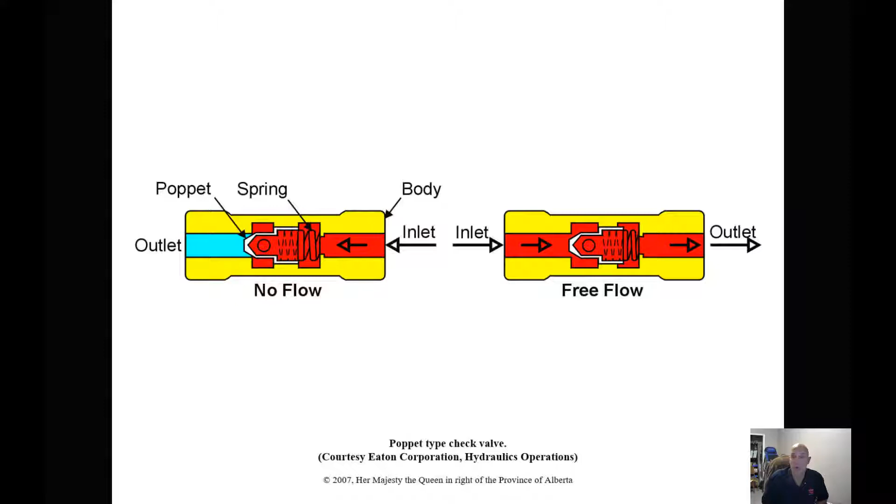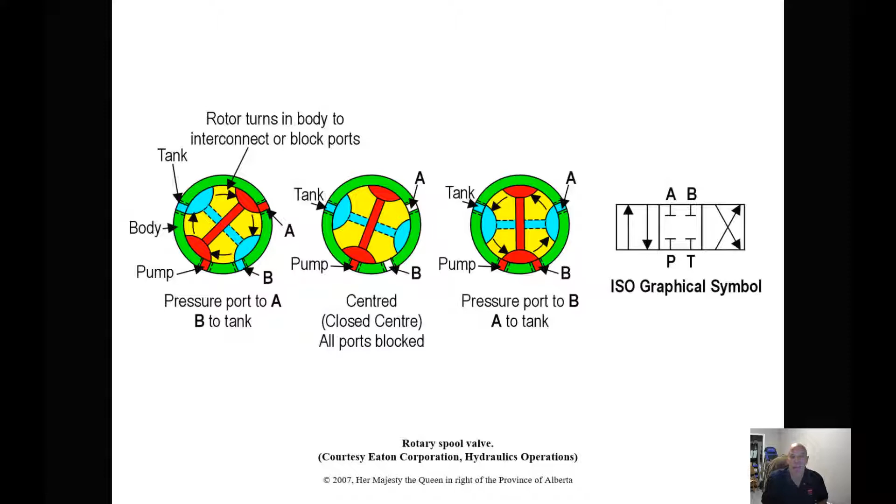A lot of these that we're going to talk about today, we've already looked at. So for instance, a poppet style check valve. Again, it's just a check valve, and it uses a spring to close it so we only get flow in one direction. When we're taking a look at a rotary spool valve, again, when we look at a schematic, it may not tell us, or it's just a closed center system. So we don't know it's a rotary spool valve. We may have to look at the piece of equipment. Doesn't matter whether it's a rotary spool valve or a spool valve. Again, they both have the same schematic and they both do the same thing.

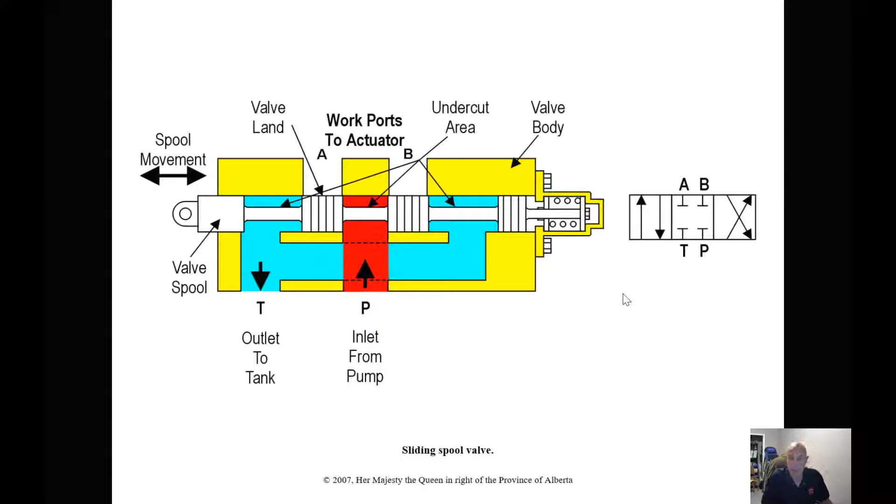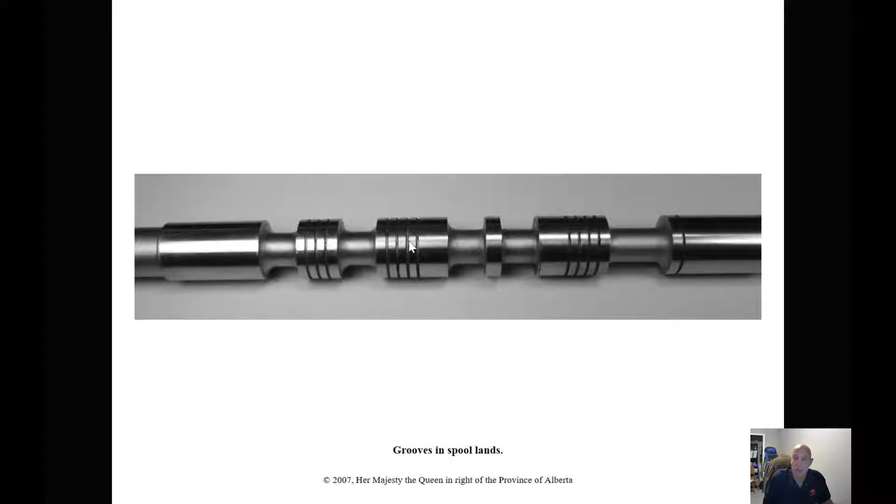So when we take a look again at the spool, the grooves in the spool retain some oil to help seal the spool so we don't get any leakage. We have metering notches on the spool itself so we can feather the control to move the cylinder really slowly. We take a look, we have an accumulator. We know it's a gas charged accumulator. We have a one-way check, positive displacement pump, a relief valve in the system, and a reservoir.

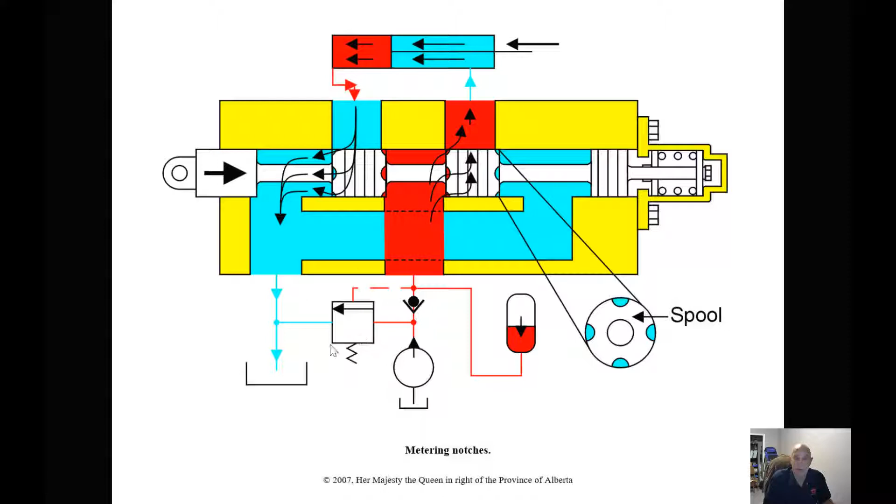Now, one of the things we didn't spend too much time on is that a control valve may have 4 positions. So when we let go of the controls, with the spring, it goes back to a neutral position where the controls aren't moving. So anytime we have any issues, if we let go of all the controls, it should go back to a neutral position. Everything should stop. So if we pull back, we have a raised position. We push forward, we have a lower position. We push all the way forward, and there's usually what's called a detent that will go into what's called a float position. And this allows the oil to travel from one end of the cylinder to the other end of the cylinder, back and forth, without us moving any of the controls. Some operators will use this for backblading.

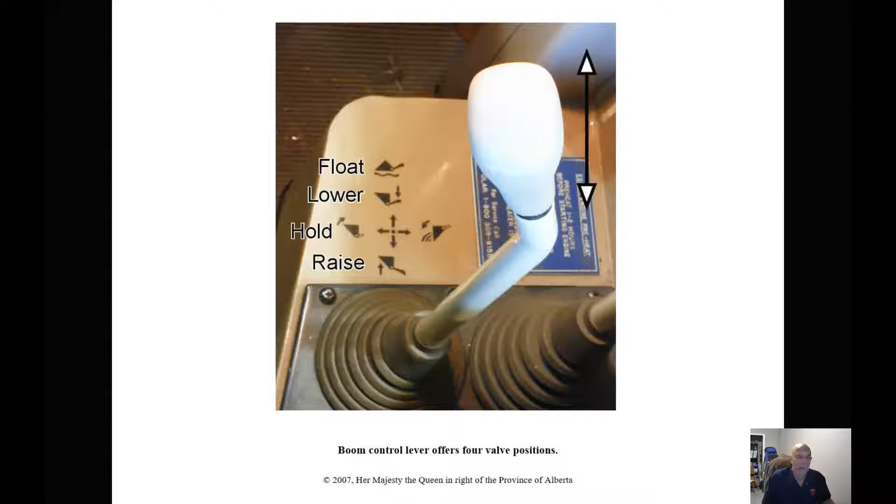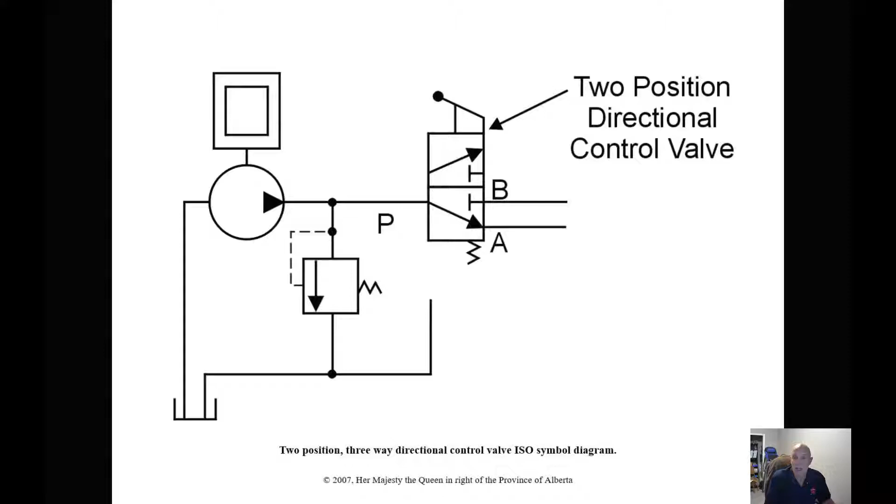So let's take a look at some control valves. So here we have a 2-position 3-way. As we discussed earlier, we have 2 separate blocks, so we know that's a 2-position. 3-way means we have 3 lines coming in and out. So here's 1, here's 2, here's 3. So where would we use something like this? Well, we could use this in a dump box to raise and to lower. Or we could have it go to some component that doesn't return the oil back through the valve. So here, oil can go out to either A or to B.

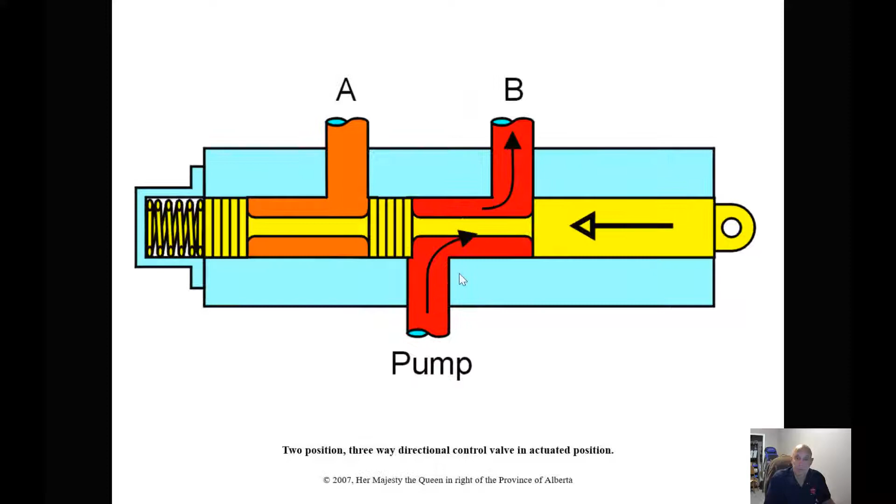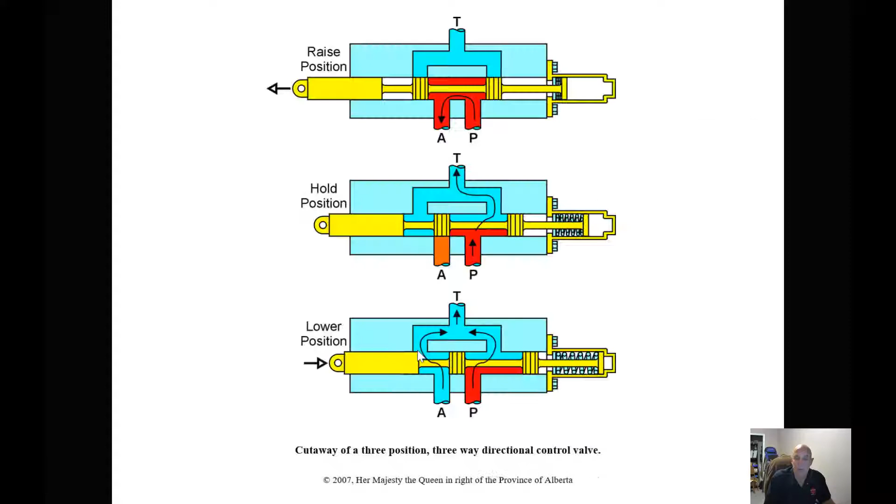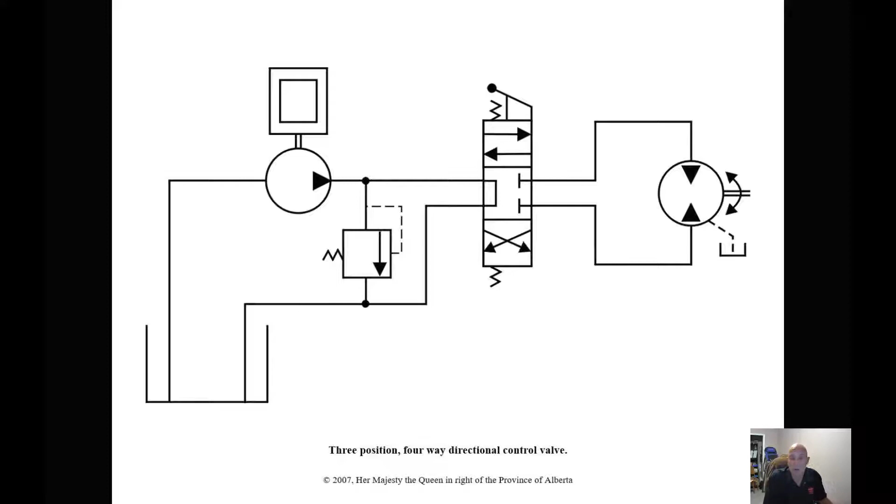And here's a good way to test if, for instance, the motor isn't functioning properly and doesn't have the power we need: we can just pull off the case drain and drain it into a bucket and see how much leakage we're getting past that motor through the case drain. That may be where our issue is. So it's a good, quick, easy way to check. The 3-position 4-way valve is probably one of the most common that we're going to see.

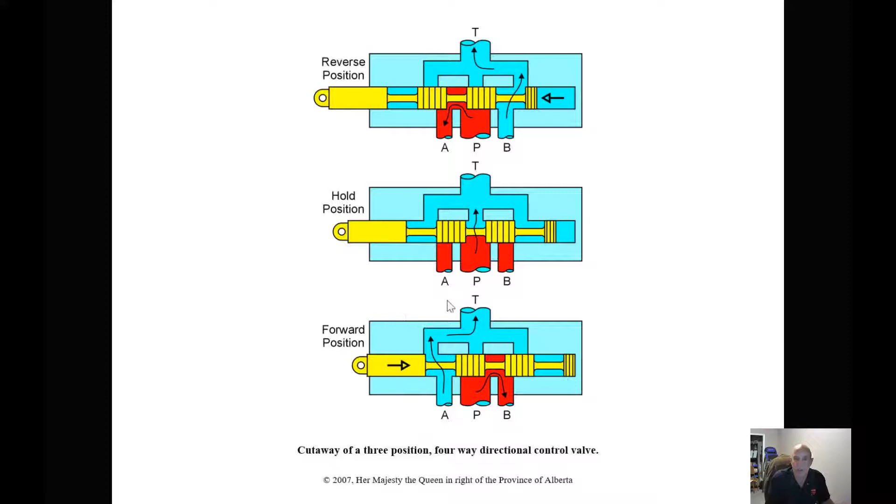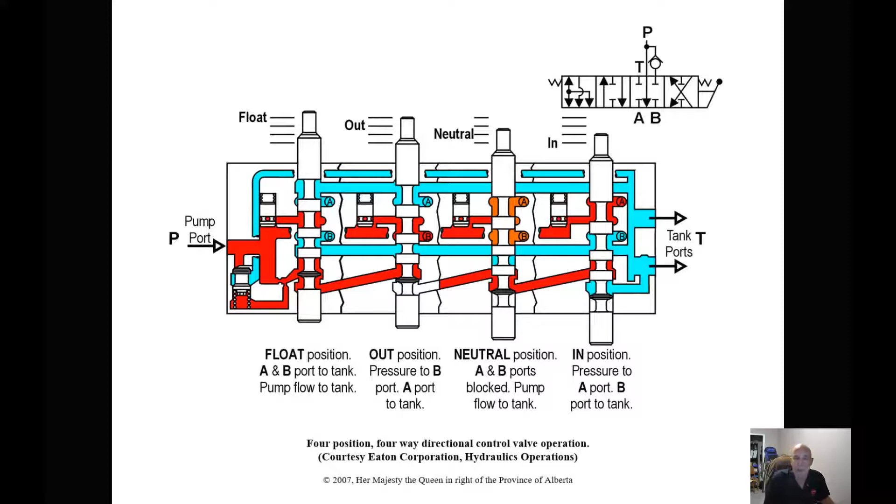Now 4-position, that is the 4th position is the float position. Again, what it does is it just opens everything up and allows oil to flow freely back and forth to any end of the cylinder we want, and it can also return the oil back to pump or back to tank. So we've discussed open center and closed center systems. Again, open center systems return the oil. There's no restriction in the line. The pump runs all the time, displaces the same amount of fluid.

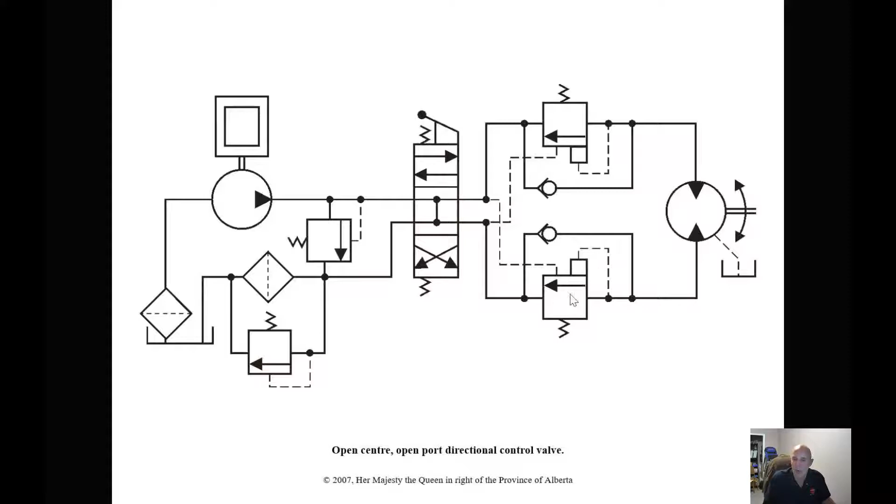So when we supply pressure to one side, it can go through and allow the motor to turn. As the motor turns, it builds pressure in the opposite side, because as fluid's coming in to turn the motor, that other fluid that's in there has to be displaced. It can't go out this check, but it will run this pilot line that will open up this valve and allow that oil to return back to tank. Does the same thing when we go in the opposite direction.

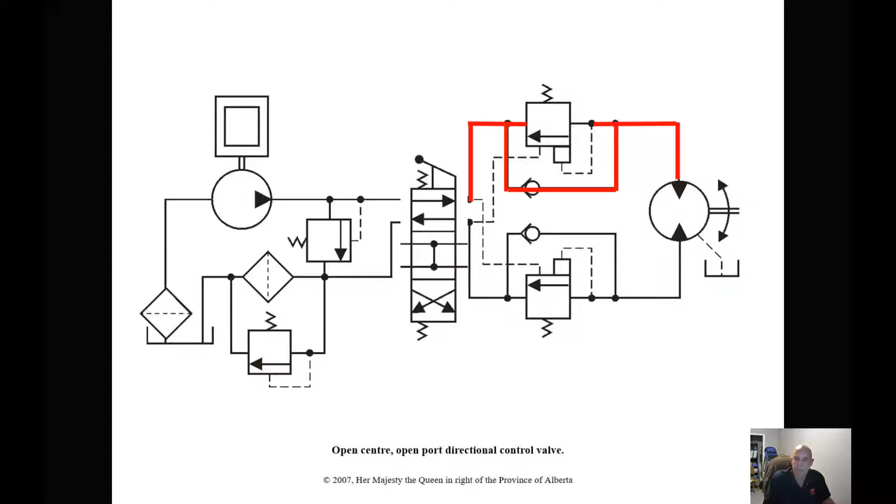Closed center system. When we have a closed center system, we have to use a variable displacement pump, or we should be using a variable displacement pump. So we can vary the swash plate angle, and when we vary the swash plate angle, we vary the displacement that the pump's putting out. The pistons are still turning inside the pump, but because we have zero swash plate angle, we're not displacing any fluid. As the pressure drops in the system, it will start to stroke out and start to displace more fluid.

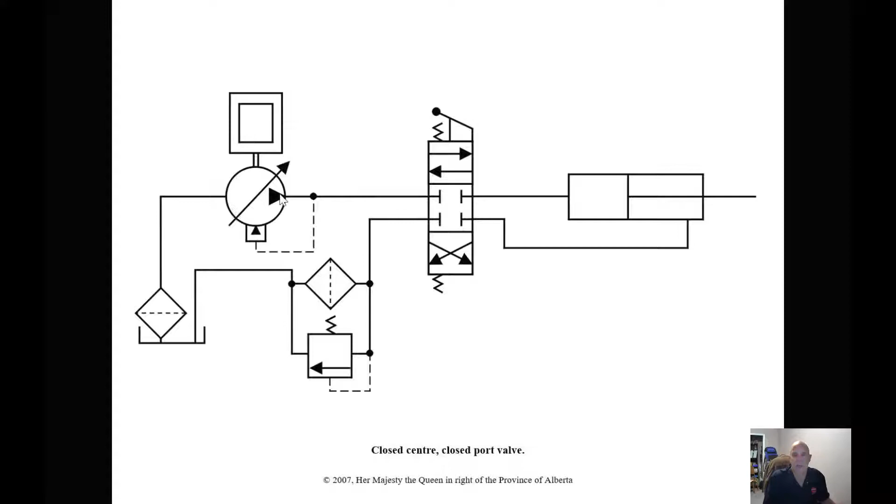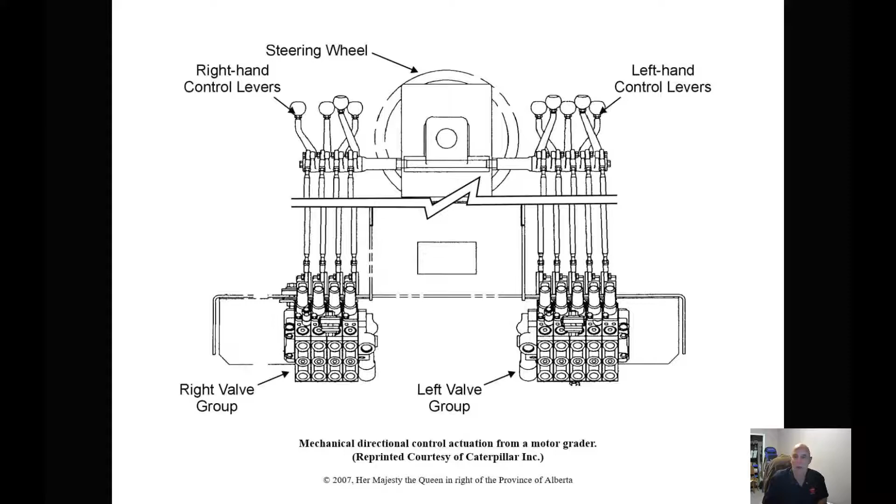Now, we talked earlier about having mechanical controls on components, and the big issue with this is the control valves have to be close to where the linkage is, so that we can have that linkage without having a lot of components moving, because as these components move, they create wear, and then we're always having to fix that. So one of the things we've done is gone to what's called a pilot operated system. Number 4 is our variable displacement pump, but number 1 is a pilot pump.

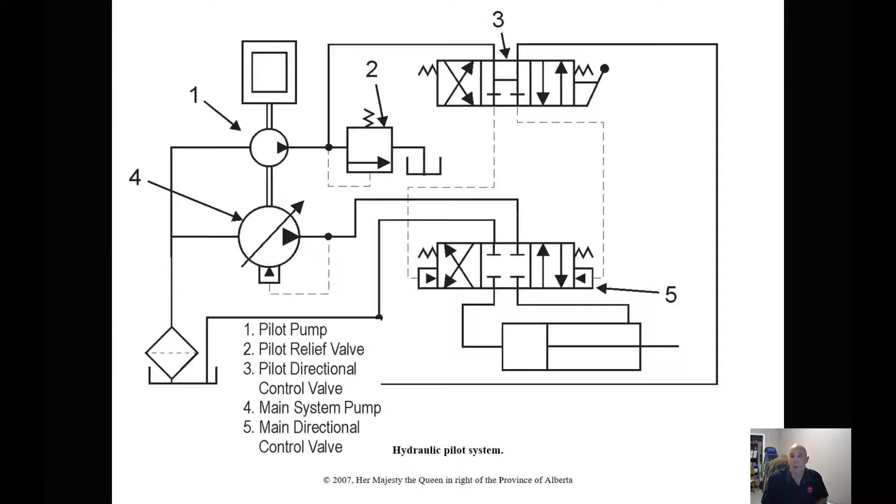Now this pilot pump can be bolted to the back of the main pump. Let's just say that the pilot pressure is 300 psi. This is a positive displacement pump. Once that pressure gets to 300 psi, this is going to open number 2 and dump any excess pressure out. Now this pilot pressure can act on the main control valve and move the main spool valve back and forth to direct oil to the cylinder. Pilot operated systems are great because now we can use low pressure lines and have these control valves inside the cab, and these lines just run out to the valve body that's close by the rotate manifold, and we can control all of these with low pressure oil.

So another thing, when we're taking a look at a pilot operated system, they vary, so understand what the schematic is telling you. Looking at this, there is a control valve in the cab, so when we move it one way or the other way, it's going to direct oil down to this spool valve and move it one way or another. We see springs on each end, so when we let go of the controls, the spool will center itself and the movement of the cylinder will stop.

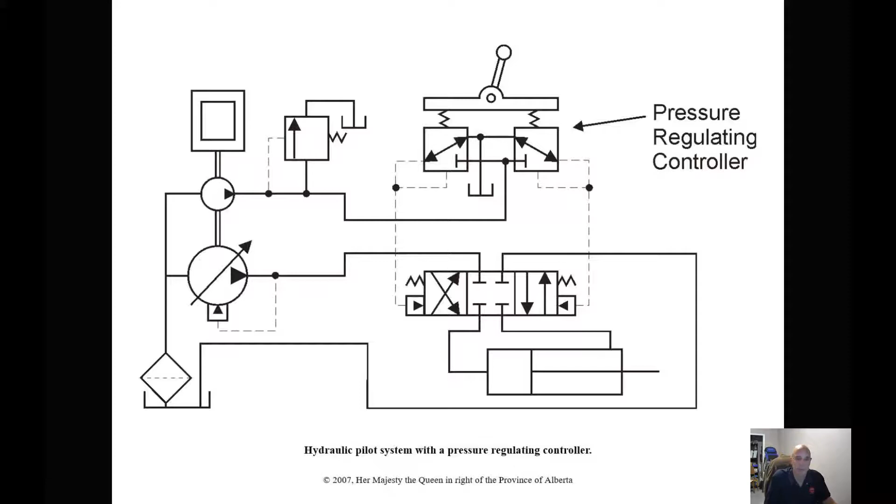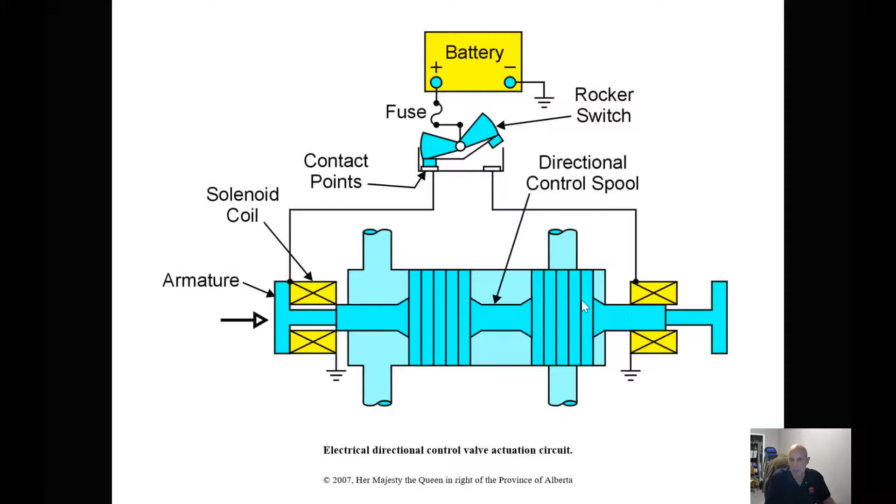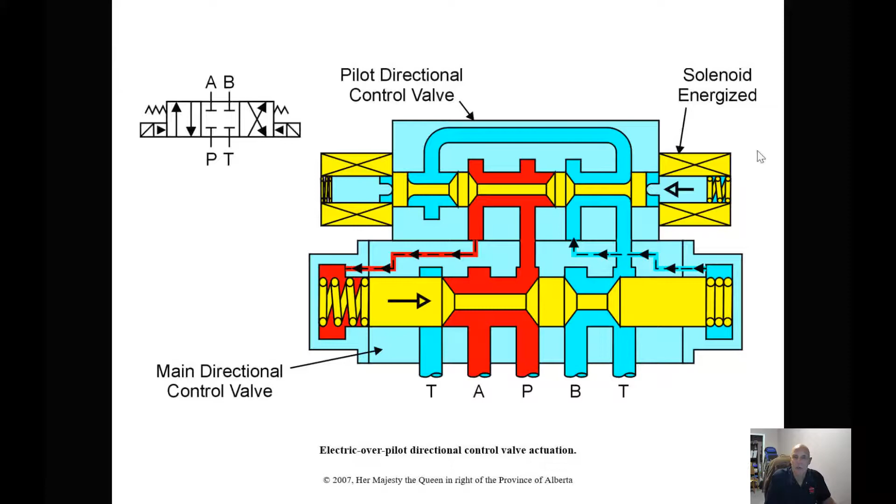So another one we might see is an electrical directional control valve. These are either on or off when we're dealing with this one. We'll talk about pulse width later. So when we energize one side, it energizes a coil that creates an electromagnet that pulls the spool in and allows it to move in one direction. We put it in neutral, it de-energizes, and it will go back into the center position. We push it the other way, and it energizes this coil, and we'll pull the spool from the right to the left. So, electric over pilot direction control, again, these are on and off, and we're just energizing one or the other in a pilot operated system.

Now, another thing we have is mechanical detents, and you'll see from looking at the schematic, we can have detents on both ends or one end. All it is, we can have a detent and it will stay in that position till we move it out. For instance, if we put it in a float position, on a four-position valve the fourth position is a float position, we can let go of the controls and it will stay in the float position till we physically move it out of the detent.

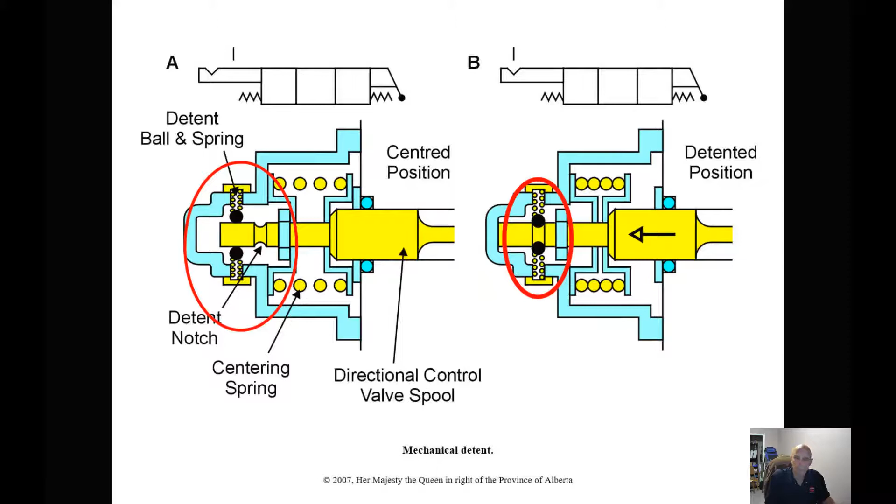We can also have an electromagnet detent. For instance, on a boom, I can pull this. Let's say I want to raise the boom as I'm moving. I can have an electromagnetic detent in there, so once it gets to the top of the stroke of the cylinder, it will then kick it out.

And how it works on one of these is we have what's called a proximity switch, and the proximity switch controls the ground side of a relay. So when the ignition switch is closed, power comes into the relay and also goes through the coil and goes to the proximity switch. Now the proximity switch, again, depends on how it's set up. So let's just say that it's a normally open switch, or normally closed switch.

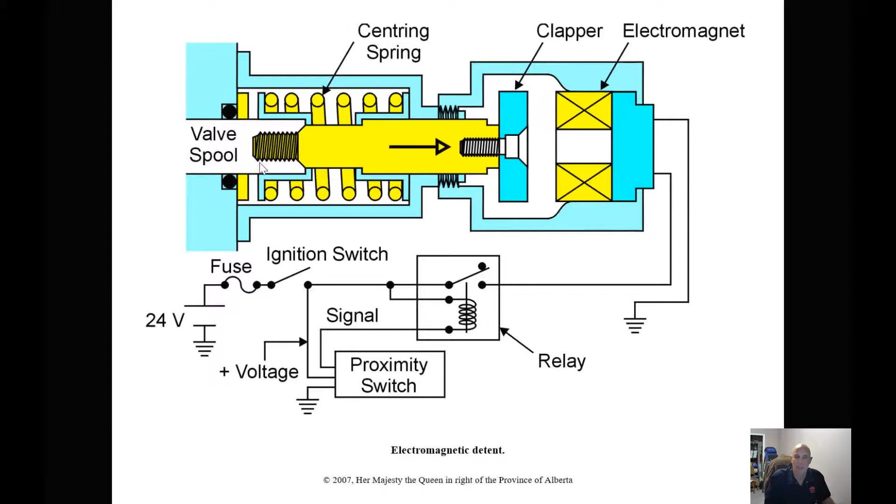As soon as I pull it in, it energizes this coil, which is going to pull this clapper valve in. Now it's going to stay in that position until the proximity switch opens the circuit, drops the relay out, and then this will go back into the center position. Now what will cause the proximity switch to drop out?

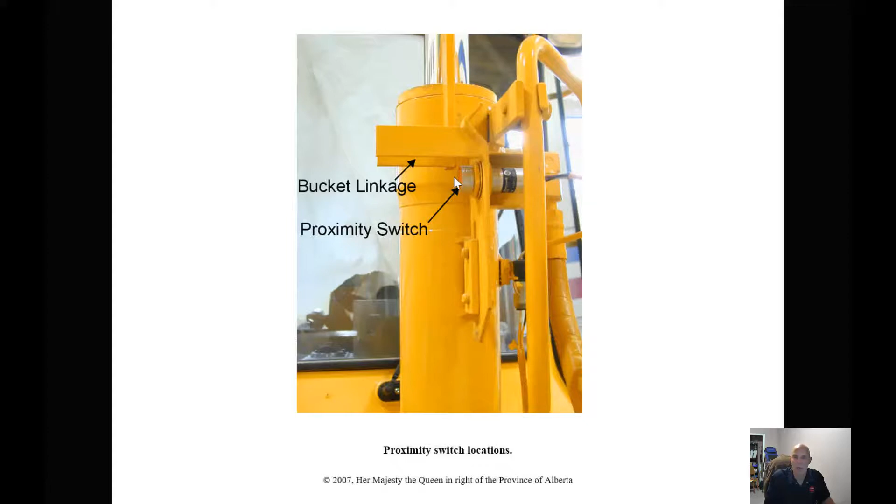Well, usually what we have is, if we take a look at a proximity switch, as it starts to extend, something's going to come in front of the proximity switch, is going to break contact and tell the proximity switch to drop out. So again, it can be a normally closed switch, and once a piece of metal comes in front of this proximity switch, it's going to drop out, the electromagnet will drop out, and the boom will stop raising.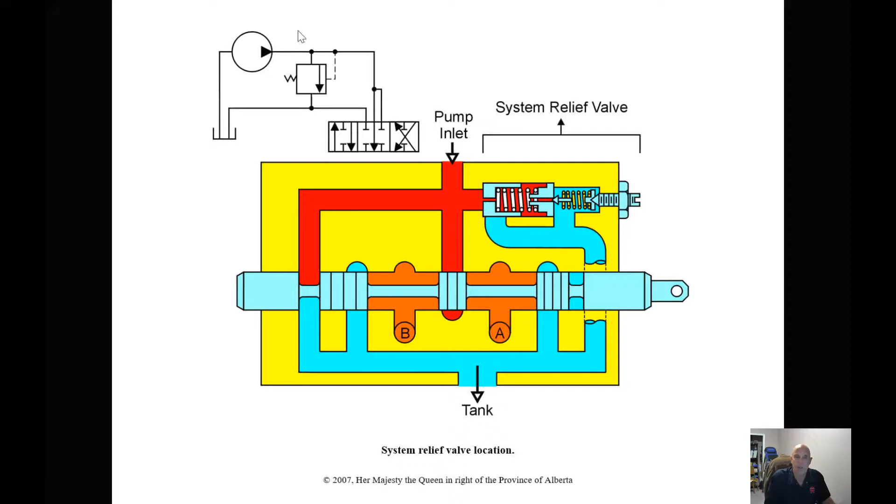System relief, again, we've talked about system relief and circuit relief. So a system relief relieves the whole system, where a circuit relief is going to relieve the circuit. So we can have a circuit relief on each side of the circuit. If it doesn't have a circuit relief valve, it uses system to relieve that pressure.

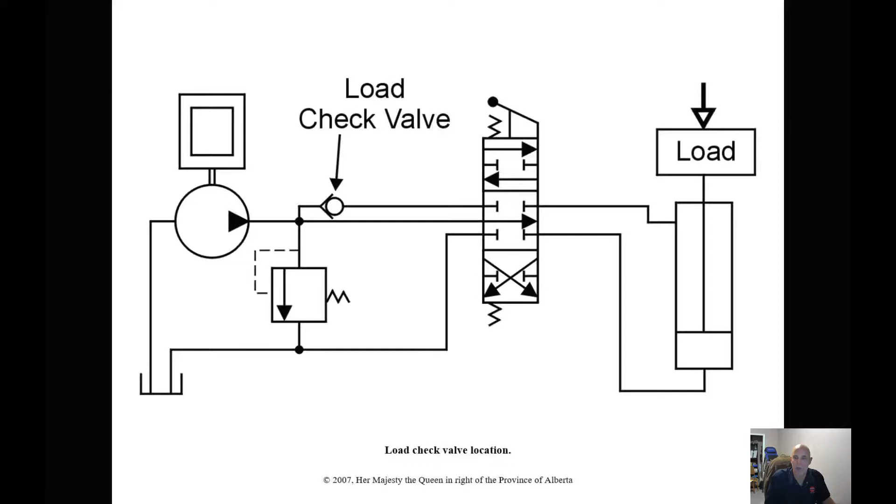Load checks. Now, load checks are in the system to prevent the load from dropping unexpectedly until system pressure comes up. So, directional control valve with a load check.

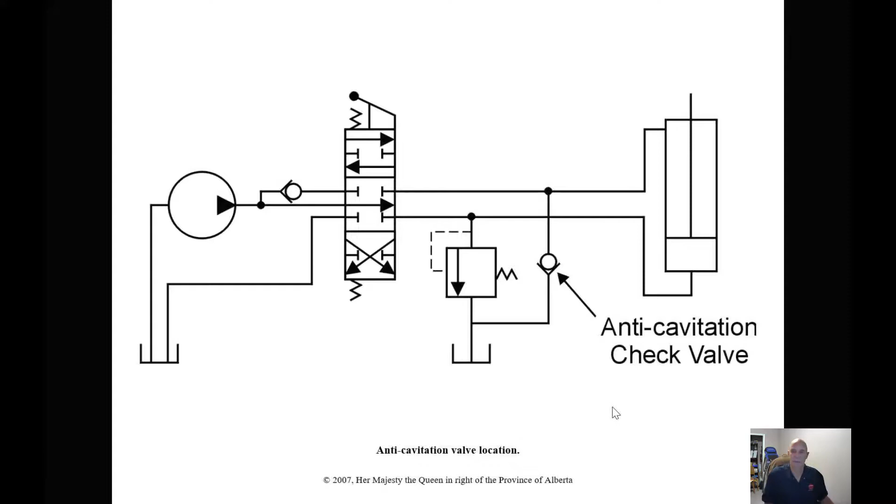Next one's an anti-cavitation valve. So, again, remembering what cavitation is. If I want to drop a cylinder, or let's say a blade, really fast, I would be putting oil to this end. Now what happens then is oil can't fill this end of the cylinder fast enough. So what it's going to do is take oil from the return side and allow oil to come in to fill that void. So this is what it looks like on a cylinder.

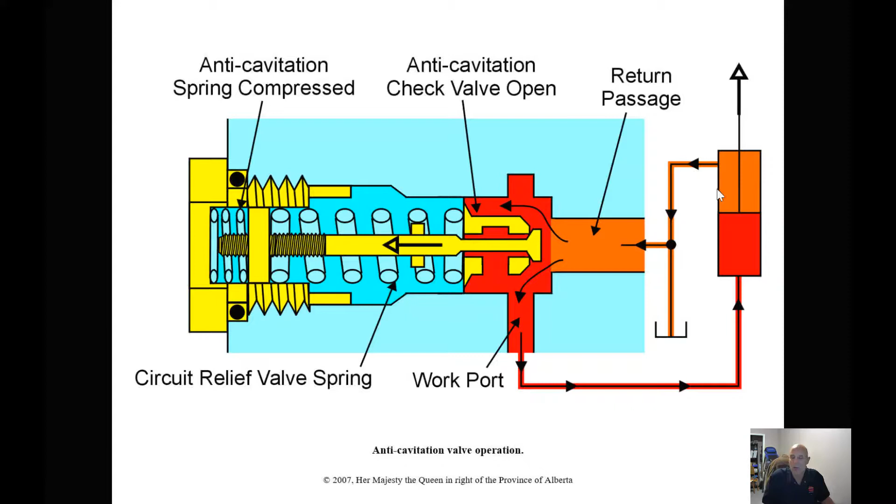So here we have pressure coming in to extend the cylinder, and this returns to tank. But what happens when I want to extend that cylinder really fast? The pump can't provide enough oil, so it takes that return oil and runs it into this end of the cylinder to prevent cavitation. Now remember, cavitation is a negative pressure that forms a vapor bubble, and we don't want this inside the system. So this is what this anti-cavitation valve prevents.

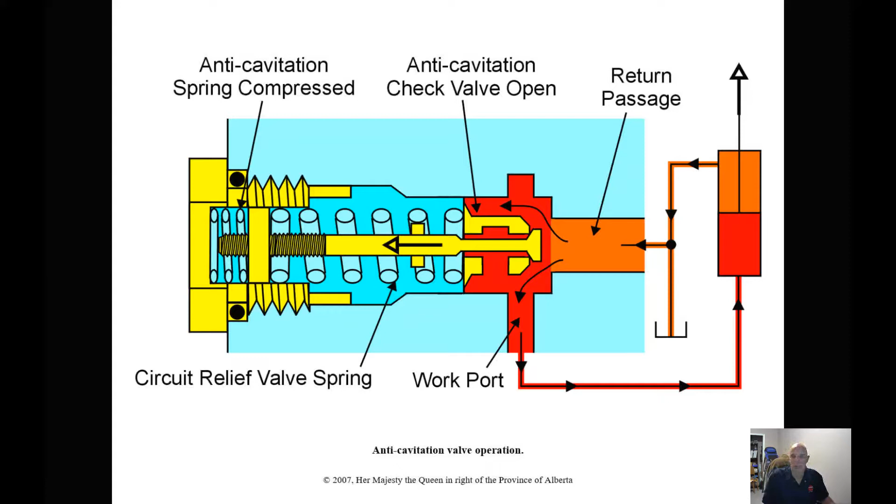It just takes return oil and routes it back through the system as makeup oil. It can also be used as a circuit relief. Okay, directional control valves. We may see double check valves in the system. Again, understanding what they do in the system.

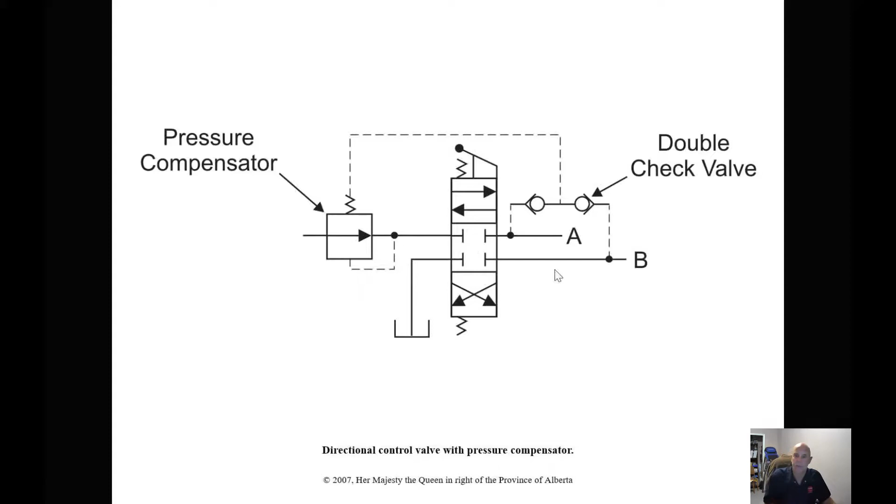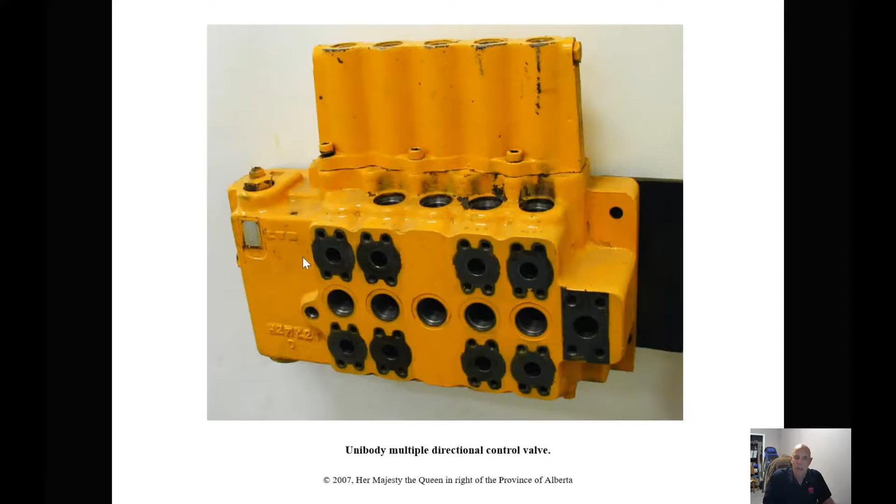Now, when we're dealing with valve bodies, unibody is cast all in one piece. If we have a failure of one component in here, the whole valve body has to be replaced. So that's where we see a stack of control valves. And what we'll have is a piece of bar that goes through here, 1, 2, or 3 bars, that an O-ring seals each individual one. So if we have a valve failure, we just have to remove that one valve body and replace it with another one.

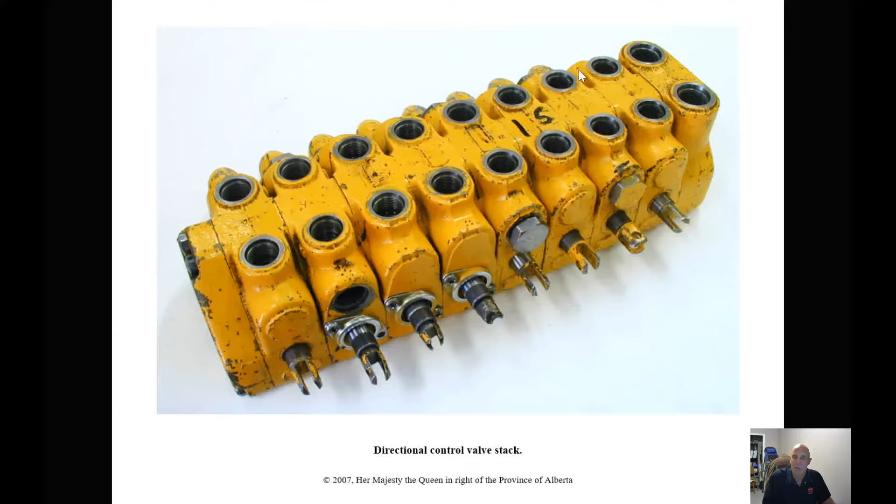Again, you can see that this doesn't have a relief valve, this one doesn't, and so on. So again, these are going to use the system relief. This one here has a circuit, this one here, and this one here. So again, on the other side, we may or may not have circuit reliefs.

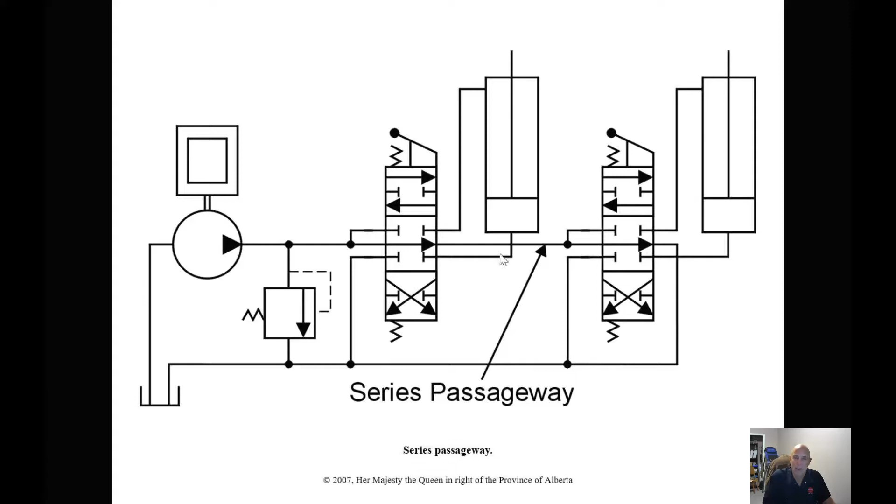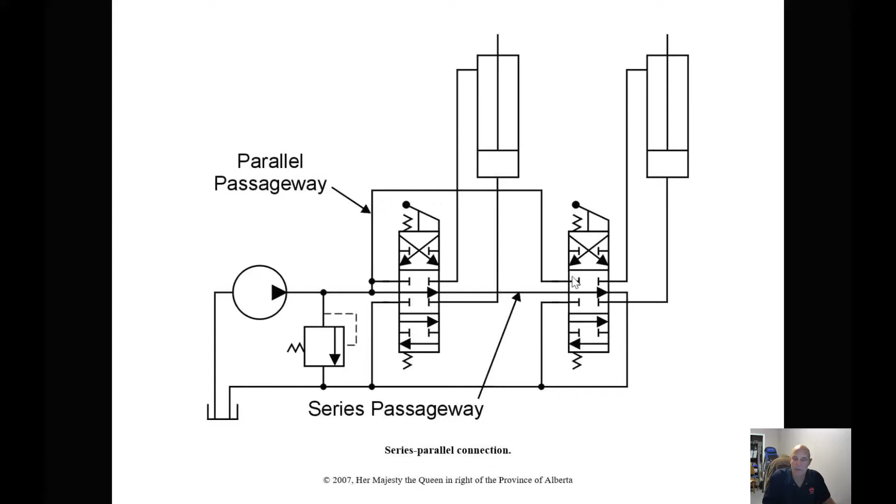So series passageways. In a series circuit, flow has to go through one before it can go through the other. When we get into different types of circuits, we can have tandem, where it goes through this one, then through this one, and returns back to tank. We also have series parallel connections where this goes through this way and returns back to tank, but also has a parallel circuit that can feed another control valve.

So open center systems. Now a diverter valve. What it's going to do is divert the flow. So in our diverter valve, if it's set in this position, this main control valve is used. When we move our diverter valve to the other position, now we can use our auxiliary control valve.

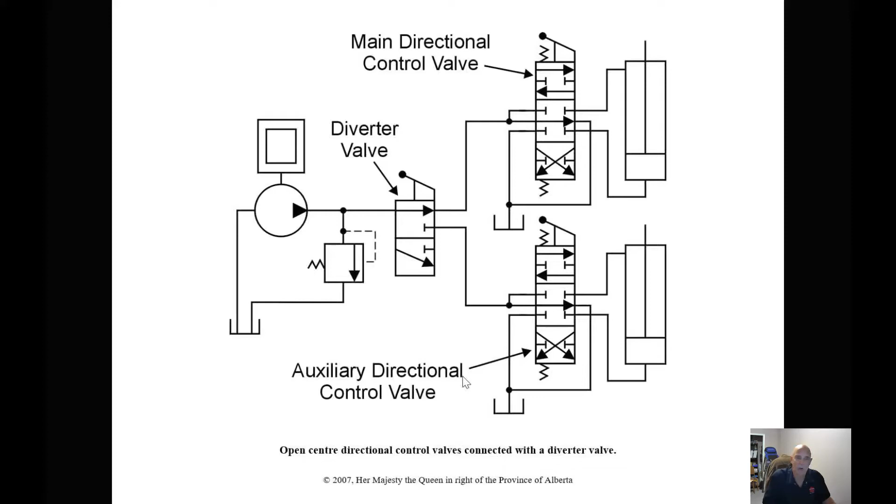So one of the things to look at is what's called a power beyond sleeve or a power beyond fitting. For instance, let's just say I've got a machine that's got a detachable hoe on the back. So I can use a power beyond fitting so that the oil doesn't return to tank through the control valve. It's got to go through the hoses that are quick coupled together for my backhoe.

So for instance, if I want to hook up the hoe, I'm going to shut off the machine, disconnect the hydraulic lines, hook them up to the backhoe, start my machine, and then with my power beyond fitting, now hydraulic oil runs to the control valve on the backhoe. And I can use the backhoe however I want.

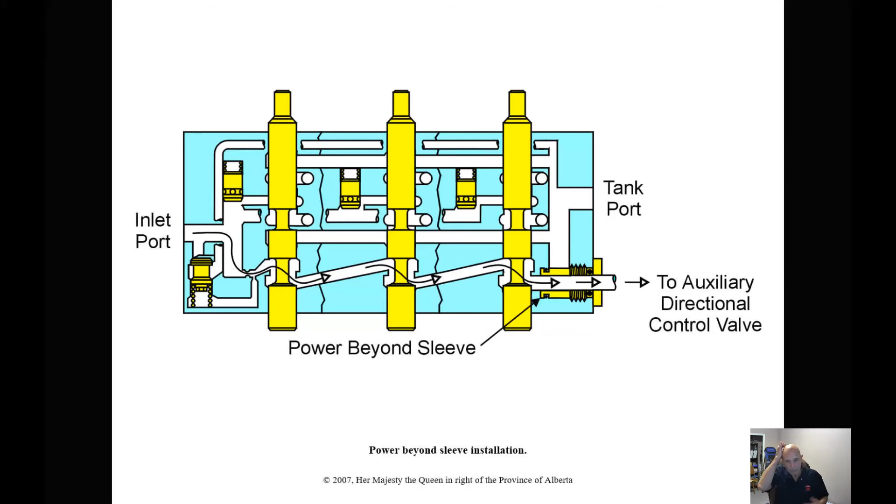When I want to disconnect the backhoe, I have to disconnect the hydraulic lines to the hoe and then couple them together with a quick coupler. And now I can just run the machine. So again, taking a look at different types of parallel connections. And that's the second video on valves.